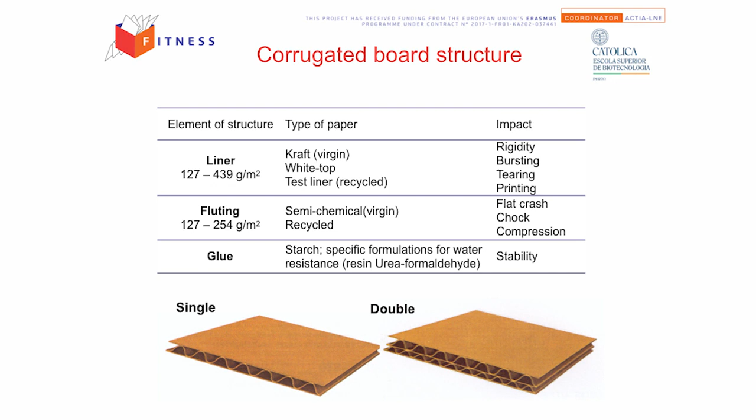So if I take this layer out, so if I have just one liner and a flute, this becomes a flexible material that can be rolled up, and sometimes is used to hold bottles also. So in fact, that was the first structure invented, for the Queen's hats. Later they added this second liner, which makes the blank flat and increases the resistance. Anyway,

the flutes or the waves have different characteristics. The A is the larger wave. Then we have the B that is smaller. Then they realized that A was too large for some applications, B was too short for some applications, so they invented the C with the size in between, and more recently E, F, G, and very small wave sizes have been invented. So what we call the micro corrugated. So A is the large, B is the small, but then C is the medium. That's why they apparently do not follow a logical order, but this was how it was invented.

So here we see the characteristics, the height of the wave, and here is the number of waves per linear meter. And of course in the micros we have much more than in the large. And the take-up is the amount of material needed for 1 meter of corrugated. So we have different characteristics. This is regarding the sizes, but regarding the performance it is also different. Okay?

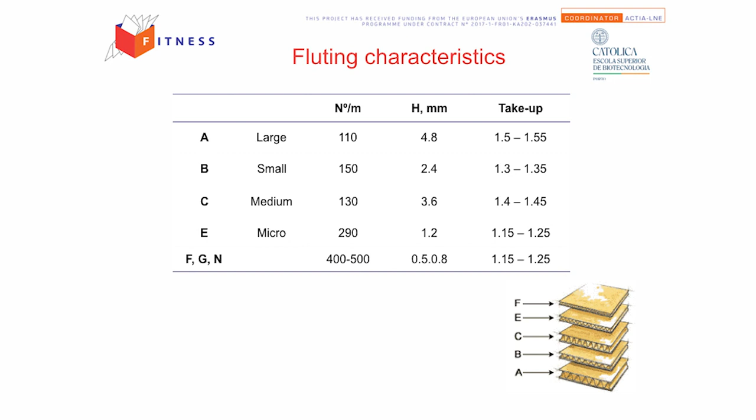A is excellent for the stacking resistance, but is weak for printing. We don't see such a good printing when we look into the printed image on a board made out of corrugated type A. It is not so nice, because we can see a little bit the waves. So printing is better when we have micro corrugated, so very small waves. But in this case we have weak stacking performance, and so on.

So during the production of the box, or transformation of the board into the box, we have operations for printing, die cutting, and so on. And we also have requirements for the use of the box. To balance these two types of requirements, we often need to combine different types of flutes. And this is why often, when we have the double or the triple structure, the flutes are not equal. We have smaller in one layer and larger in the other layer.

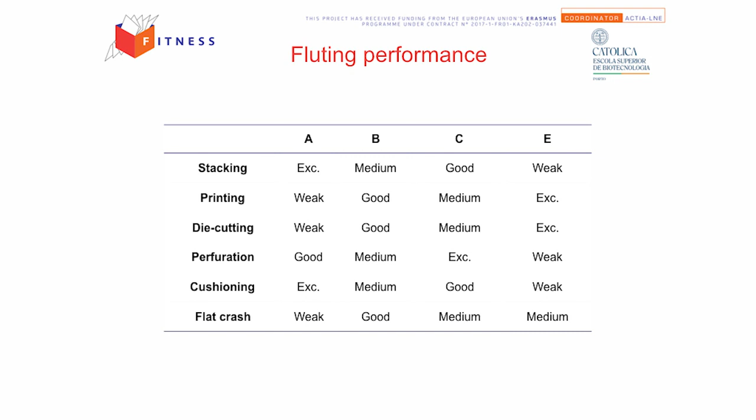And regarding the dimensions optimization, I think we can see better in this picture what we ended in the last section, when I explained that the dimensions of the box are always length, width, and depth, the length being the longest side of the opening side, the width the shortest, and the depth the third. So we have these two boxes. They have the same dimensions, but the opening side of this one is this side, while this is this side.

So in this box, the length is this, the width is this, and the depth is this, while in this box the length is this dimension, the width, and the depth. So we always use the same order, length, width, and depth, but we must not forget that the length is not the longest dimension, it is just the longest of the side where the filling of the box is done, and that depends on the filling line. This is important when ordering boxes, because if we mess this up, then in the line we cannot fill the boxes, and we need to change the setup, which is not good.

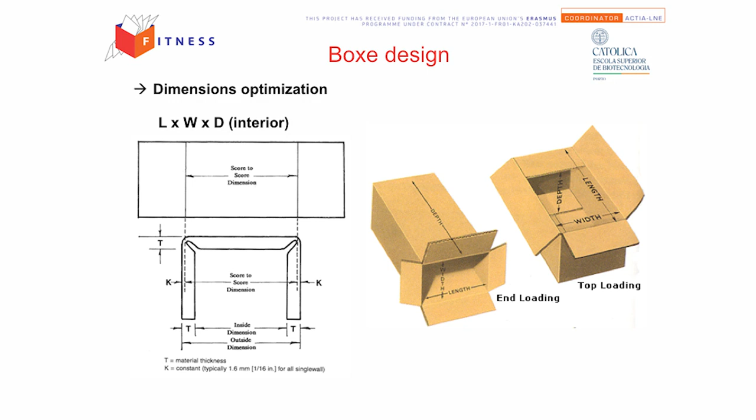Any questions? It's clear.

We have the FEFCO code, like in the folding cartons case. For corrugated board, we have the federation. FEFCO is from French, it's the Federation of European Producers of Corrugated Board. And if you look into the boxes, most of them have this label where they are stamped according to the quality of the board. We have different grades inside each category: single wall, class 2, and double wall here. And in this direction, we have the better, more resistant boxes.

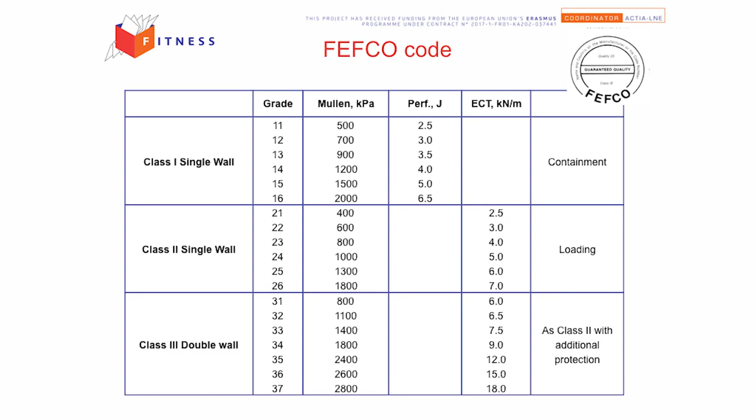And this is evaluated by three types of tests that are very common as specifications: the Mullen test, which is the resistance to bursting, the perforation, and the ECT, the edge crush test, which is a measure of the resistance to stacking. We will see. These three parameters are the most important and always used by industry as specifications and as classifications against the FEFCO code.

Very important for packaging is how the joint is fixed; glued is what is most common. In older times, and still in some cases, it is a stitched joint, but now because of safety issues, all metal parts, even in transportation packaging, are avoided, and metallic stitches are becoming less and less used. So it's either taped or glued.

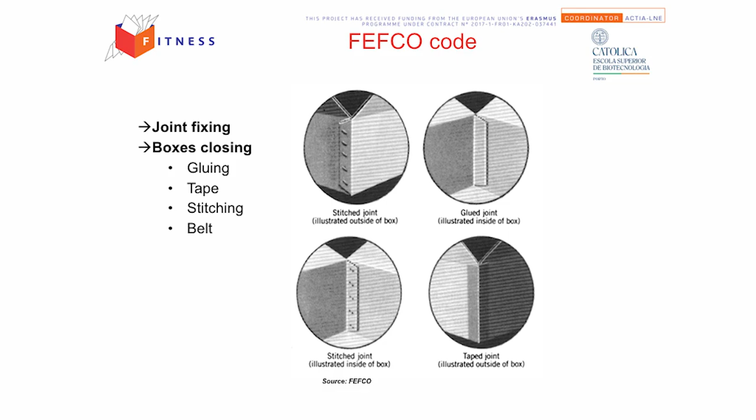And here are a few examples of the FEFCO code. We have here the complete set. Again, we use numbers to designate the different types. The most simple boxes are the slotted type, and here you have the first, this is the most commonly used box, and this is the second one. Can you figure out the main difference between these two boxes? You see here the box in the flat form, and here you see it being set up. Can you see the major difference between the two?

Yes, here it is completely rectangular, and here it is not. So what are the two major implications of this difference? This is a difference, yes, you spotted correctly. This is not a perfect rectangle. This is a nearly perfect rectangle. But this has two major implications. Now you must look into here. This looks like playing games, but this is real life in the packaging industry or in the food industry. These boxes have completely different performances and costs.

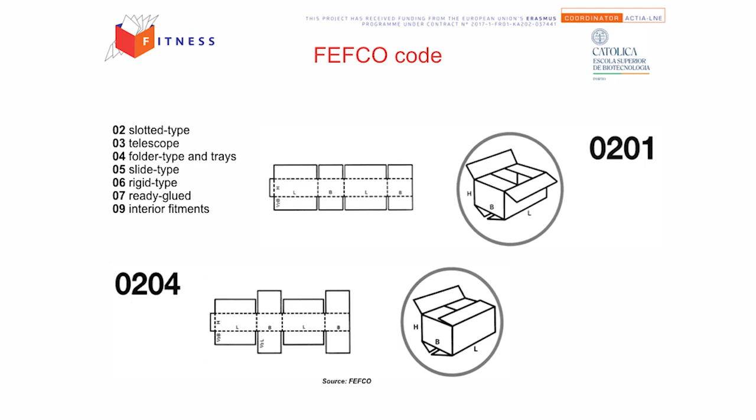We have other types of boxes, like number 3, where we have two pieces. Number 4, we have kind of envelopes, and so on. So if you want to see exactly other codes and types, you can go into the FEFCO code and read there.

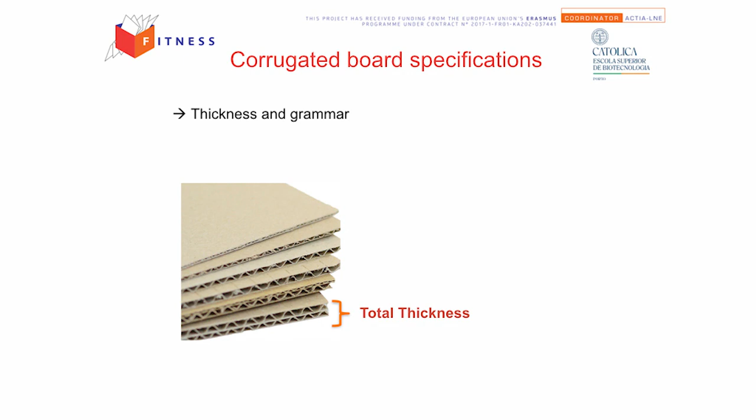Now we start with some specifications, measurements. The first one is the thickness and the grammage. We see here very clearly this type of double wall, the one I mentioned before as an example: we have a layer of a small flute and a layer of a large flute. In this case, we have two flute layers that are the same. So we need to address this to characterize our material: the thickness, total and partial, and the same for the grammage.

The bursting test, as I indicated, also known in industry as the Mullen test, is to measure the bursting strength of paper or paperboard. I could not use photos of the equipment here, but we see in the scheme that we apply a force up to bursting the board, and the pressure required is recorded. This is performed on each side of the board layers, and is usually expressed as the average of both. But it depends on how you want to evaluate your material.

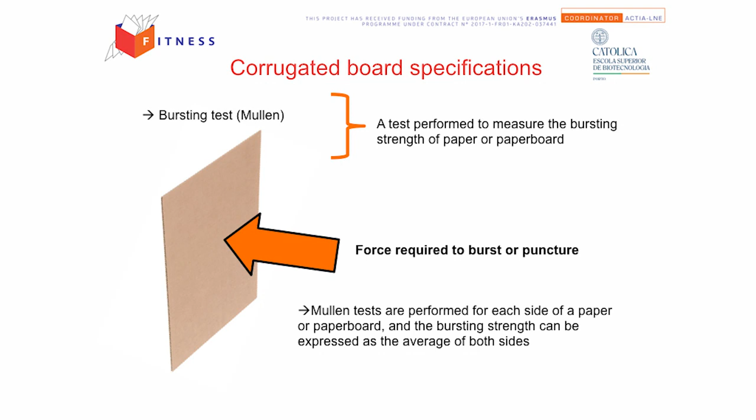The edge crush test, or the ECT: we cut a little bit of board and we do a compression test in the direction of the compression of the box. In a typical box design, there are a few exceptions, but typically the flutes are aligned in this direction for higher stacking resistance. And so this is how the ECT test is measured, and it relates directly to the stacking strength.

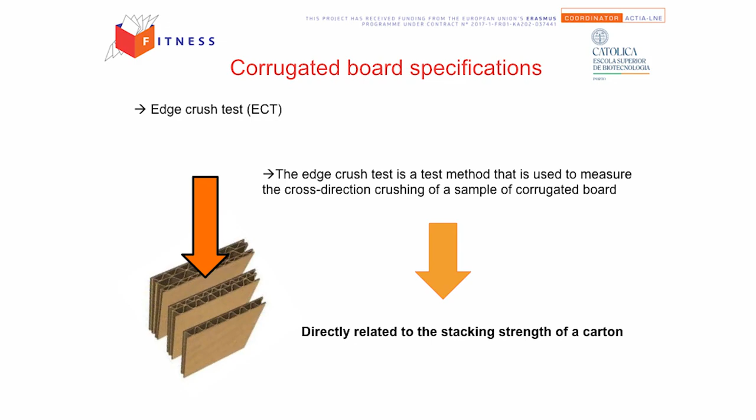So this is a test used commonly in the laboratories, but even better than testing a small piece of the board is to test the box itself. So we have a big compression table, and we put the box there, empty or filled, and we compress it. This is the BCT; BCT stands for box compression test.

And there is the McKee relationship that is valid only for one type of box, the FEFCO 0201, the more simple box type. This is the McKee relationship that relates the box compression with the compression obtained by the previous test, the ECT, the thickness or caliper of the corrugated board, and the box perimeter. Of course, a bigger box resists more, so it depends on the perimeter of the box.

Because the BCT test requires equipment that is more expensive, not all laboratories are able to have it. So there is this relationship between the ECT and the BCT test.

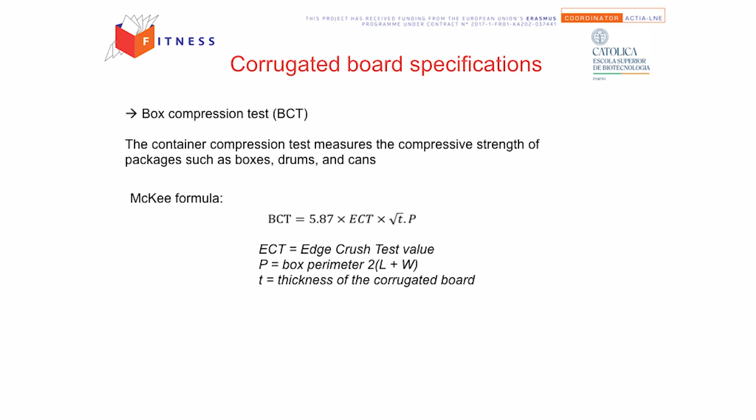And we have another test, the FCT, or flat crush test, where we compress the waves not in the direction as they are in the box, but on the cross direction. So it's a flat crush test. This is a measure of the resistance of the flutes, and this is an important characteristic for the production operations, not so much for the use life of the box, but for the production operations, printing and so on.

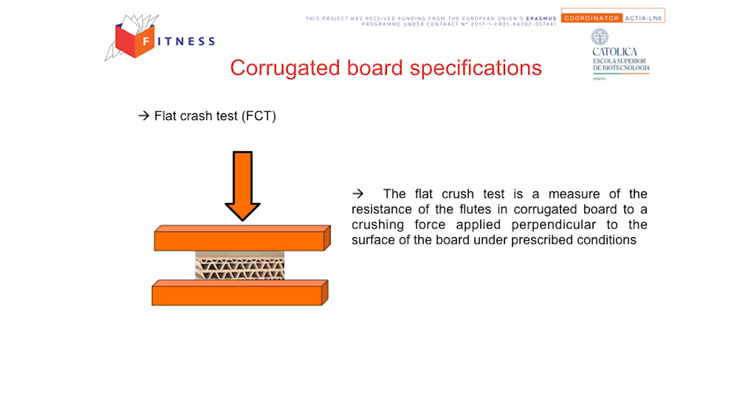And we have the bending stiffness test. It is important for boards, for paper also, and for corrugated board; it can be applied to the three materials. It is defined as the bending moment per unit of width. Here it is to bend, not to fold, because there is a similar test to measure the folding resistance. So typically we want a board that has higher bending stiffness. It means that the box will not deform easily during the stacking, during the use of the box.

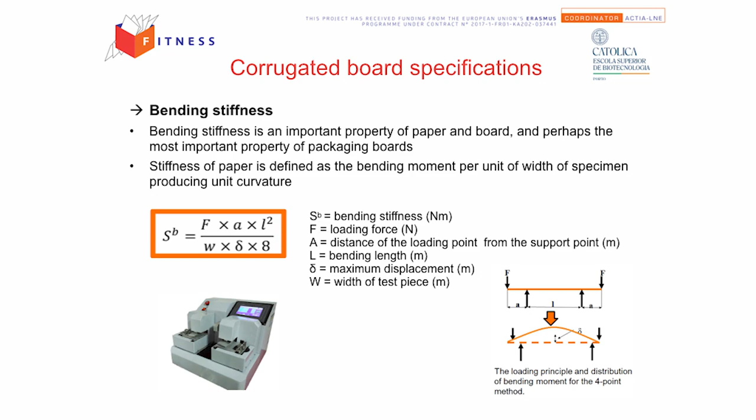And finally, the other very important specification is the water absorption of the paper. We want the paper not to absorb moisture. So we do these Cobb tests, that's how it is called, looking for low values, not high values. It refers to the ability of this material to resist the penetration.

Do you have any idea how this can be achieved in paperboard materials? How do we decrease the normal ability of absorbing moisture? The producers play with some operations like beating the fibers, and with the composition, with some additives, some resins that are mixed with the pulp in order to decrease this water absorption. So for the Cobb test, sizing, porosity, and composition are the characteristics of the board that determine the water absorption.

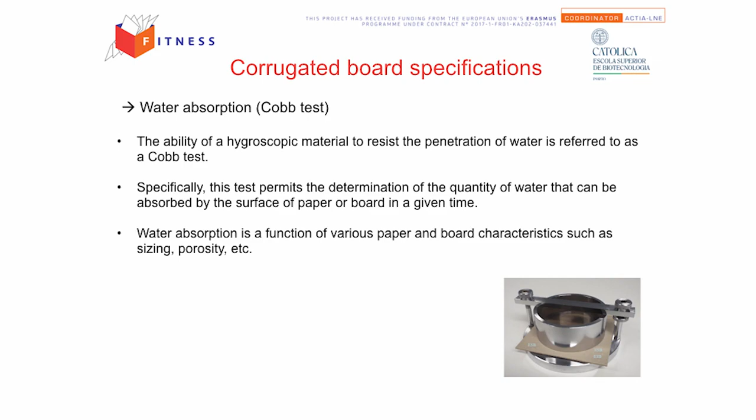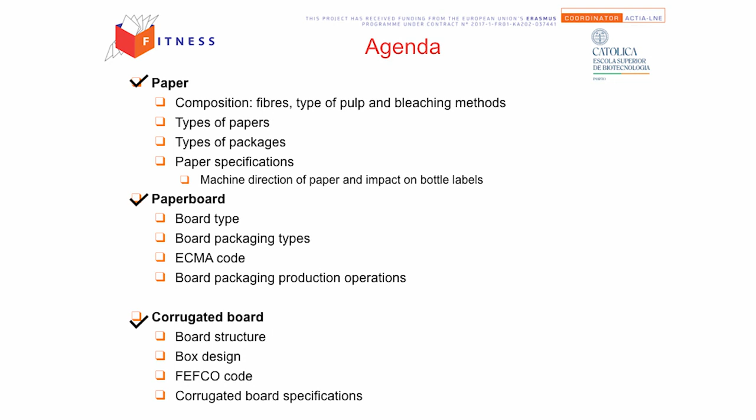Okay? So this is the last for this topic, the corrugated board. We have seen a little bit on the paper composition, types of papers and types of packages. We have given some information on the labels that are very important for bottles. And then for paperboard and corrugated board, we have seen the structures of the materials and the design codes according to the industry, which for this sector is very important, and a little bit on specifications.